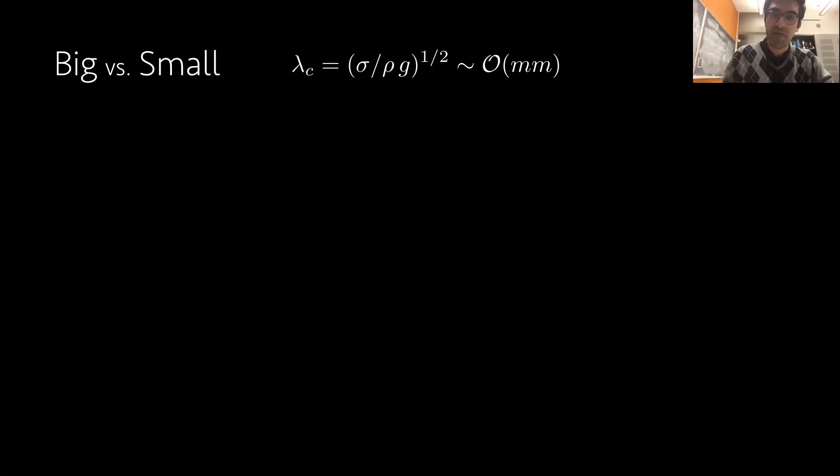But if you look at the literature on free surface viscoplastic or yield stress materials, the majority are looking at scales that are much larger. Here's an example: a mud slide in Southern California. If you're looking at mud slides, lava flows, snow avalanches, which somehow manifest yield stress materials, the scale is typically several meters or kilometers. And at that length scale, obviously much larger than our capillary length scale, you don't care about surface tension. There's a big body of work on that area.

Christophe Ancey has a review on JNNFM that reviews the work until at least 2007. It's a very nice read.

But if you go to a smaller length scale, here's an example. If you go to droplet size, your characteristic length scale of the problem is close to your capillary length scale, so this is where capillarity is important. If your material is yield stress, then plastocapillarity becomes important.

So in the next few slides I'm going to review the field, bringing some examples where plastocapillarity is significant. The first are drops. There are relatively few papers that have studied drops of yield stress fluids. I got this picture from the work of the lab of Volfango Bertola. What is shown here is the droplet dripping off a nozzle, and from left to right the yield stress of the material is increasing.

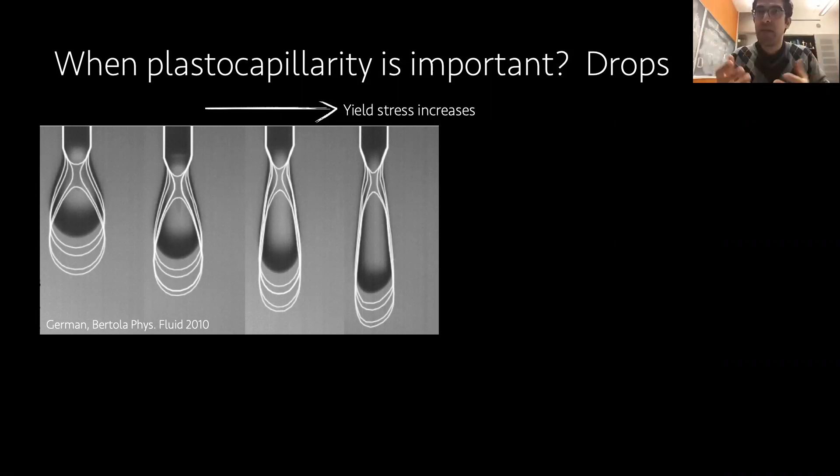The group of Bertola and some others more recently have looked at this problem. There are some other works from the lab of Coussot, this beautiful paper of Luu and Forterre, and also the group of Randy Ewoldt, who studied droplet formation and impact. But most of them, especially the one listed here on the right, paid less attention to surface tension because in the regime they studied, surface tension is not actually that important.

We also looked into droplets of this shape recently. I'll just show you some videos. What we did was let this droplet pass through an air-water interface, and through this very simple system we showed that you can get spherical or non-spherical soft particles, and in some regimes you can actually make capsules to encapsulate gas.

I'm not going to talk about this work in detail, but you can have a look at our paper. This was work with a very talented undergraduate student, Dave Kemper, in the group of Physics of Fluids of Detlef Lohse. Right, so this is about drops.

I'll come back to the drops later during the talk. But another part where viscoplasticity or plastocapillarity can be important is bubbles.

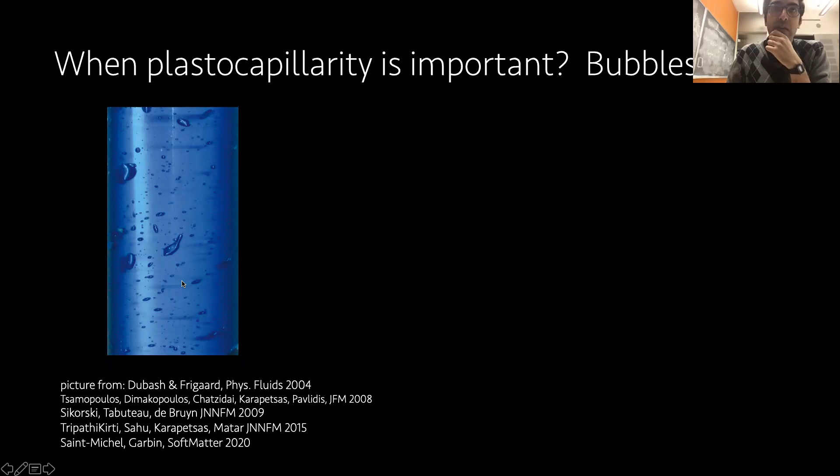Our work on plastocapillarity and bubbles was slightly different from bubbles in the bulk of fluids. We looked into bubbles like this, reaching the free surface and then bursting at the surface. Again, I'm not going to go into detail, but let me show a video. Basically, this fluid here, where the bubble bursts at the surface, is now viscoplastic.

In a work that actually came out today on arXiv, you can see how yield stress changes this very dynamic process. In particular, you can see you get this final cavity shape, which is characteristic of viscoplastic materials and doesn't happen in Newtonian liquids.

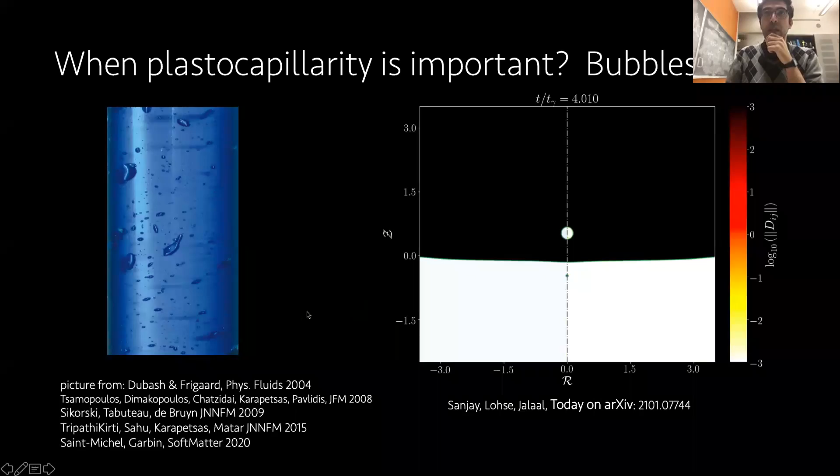More related to the talk today is the process of coating. There are many methods of coating fluids on a surface, and in many industrial applications these fluids are actually viscoplastic, or at least show some non-Newtonian behavior.

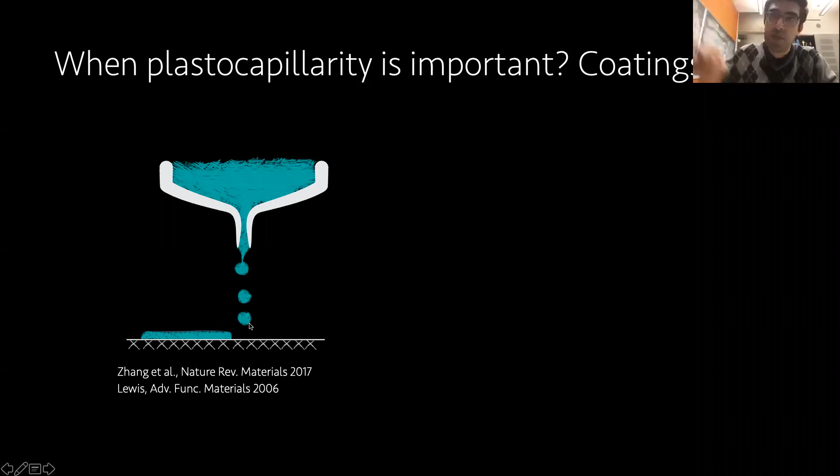One way of doing so is through inkjet printing, when you put single droplets on a surface one by one. A more common and known method is the dip coating method, where you have a piece of solid surface that you dip into your material and drag it out, and you get this thin film deposited on the surface. The thickness of this film is actually determined by surface tension, and if your material is viscoplastic, by the yield stress.

This basically is a very nice problem to study plastocapillarity. Again, the group of Coussot looked into this problem, but the regime they studied, surface tension, if I remember correctly, was not very important.

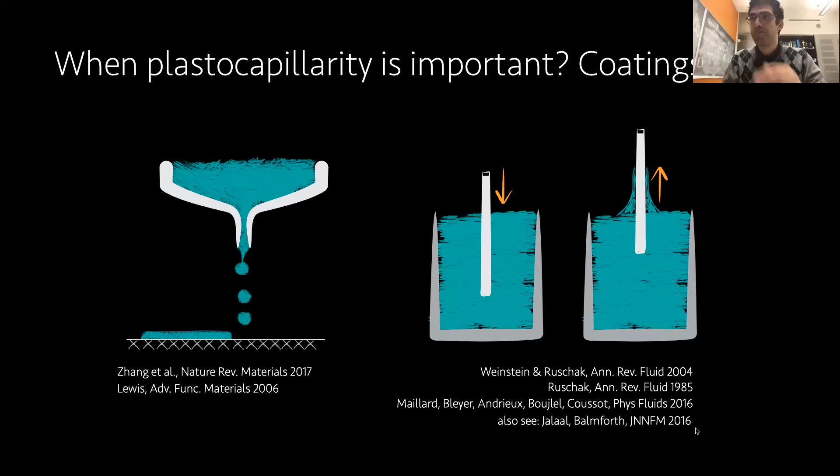What really drove me in the past few years to study this topic of plasto-capillarity is the emerging industry of 3D printing. Here I have three examples of plastic, clay, and food 3D printers. It's easy to agree that none of these fluids are Newtonian, and I guarantee all of them have some yield stress, because that's what you need to make 3D structures.

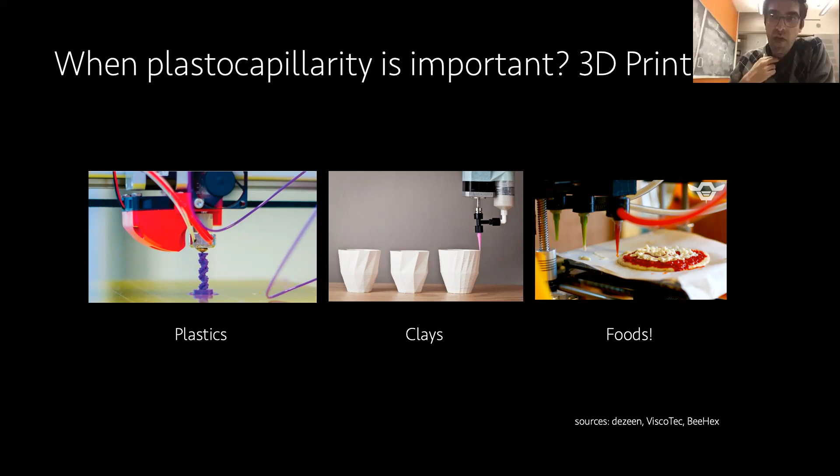You need yield stress to keep the shape intact. If you ever wonder how this type of 3D printer works—the so-called fused deposition or extrusion 3D printers—here it is. Basically, to make a 3D printer, all you need is a pressure source, a nozzle, a viscoplastic material, and a soft or hard substrate. That's all you need for a 3D printer.

What happens in reality in industrial sectors is that you put this pressure source on a robot, you program it, you give the robot the CAD file, and the robot does the printing for you.

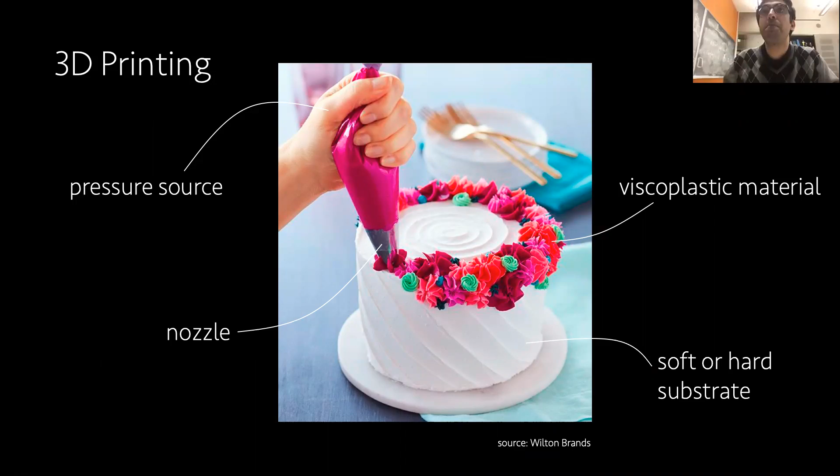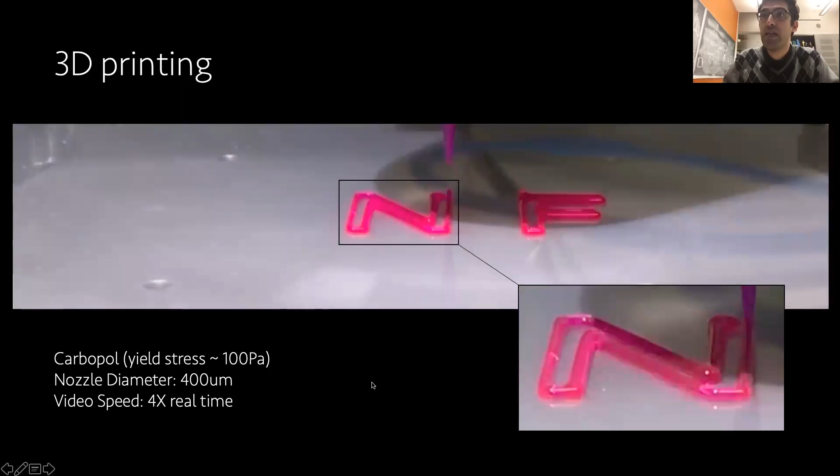Here is an example that I did just last week. My material is Carbopol, with a small nozzle diameter, and this is a speed-up. This is my nozzle printing something—I'm zooming in here. This is the first layer on top of my plastic, in this case actually a deformable surface. After the first round is over, I start printing the second round, and you keep doing this. If you have the right materials, you can print in 3 dimensions.

It's relatively an elegant science—what happens is that you spread this material on the substrate, and then spread the second layer and the third layer on top of the liquid.

This motivated us to try to answer three questions, which are the outline of my talk: how does a viscoplastic droplet spread on a surface? Can we control this spreading? Can we go a bit smarter about controlling it? And toward the end of this talk, I will come to more modern 3D printing technology to avoid some difficulties. So here is what I call the simplified spreading problem.

The problem is like this: I have a solid surface that is pre-coated with a thin film of thickness h-infinity, and I put a droplet that is much larger than that on top of the surface, and let it spread.

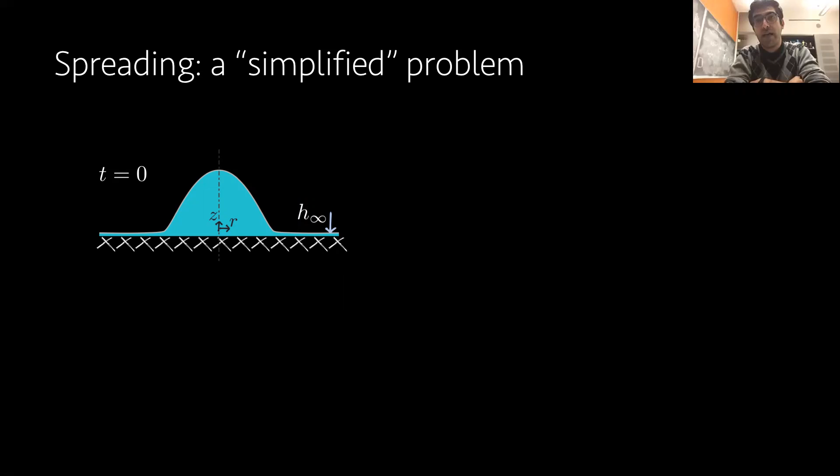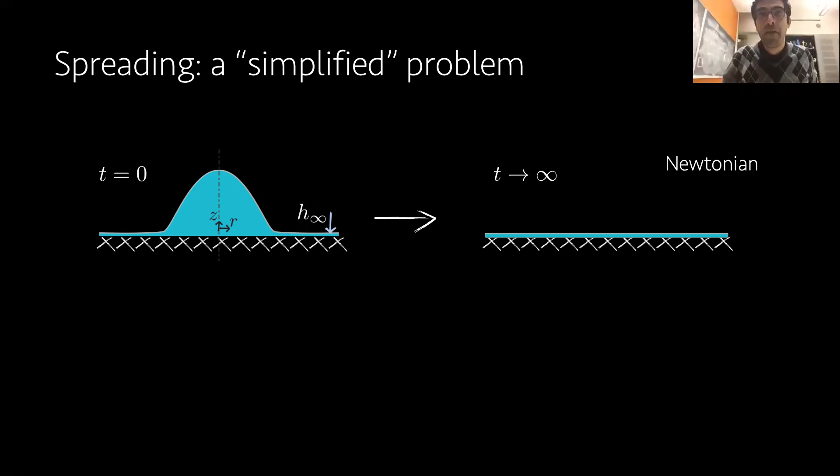If the droplet is Newtonian, you can easily guess that as time goes to infinity, this droplet spreads until it becomes fully flat—nothing stops the droplet from spreading on the surface. I won't talk about Newtonian droplets since this is a non-Newtonian fluid seminar series, but I want to note that even the Newtonian problem has a lot of interesting things to look into.

With Carola Seyfert and Jacco Snoeijer, we looked at the same problem more recently. Very long story short: if you go to capillary numbers of order 1, your smaller-scale dynamics might go through some dramatic changes. So one should be careful about capillary numbers, even when talking about a simple Newtonian case.

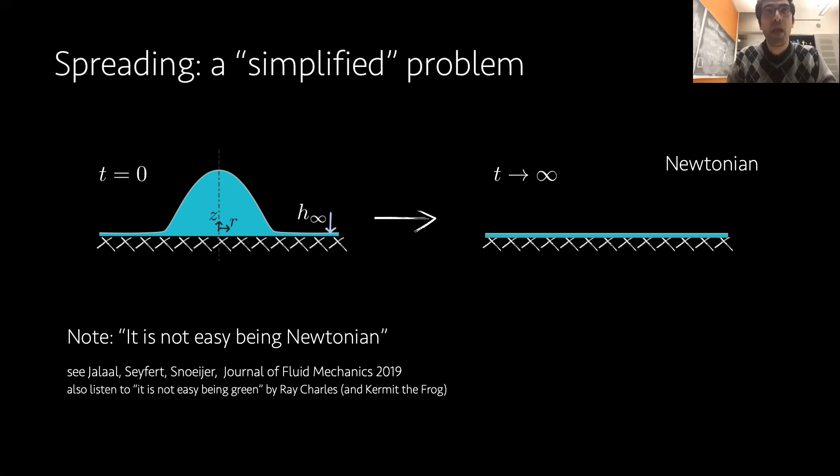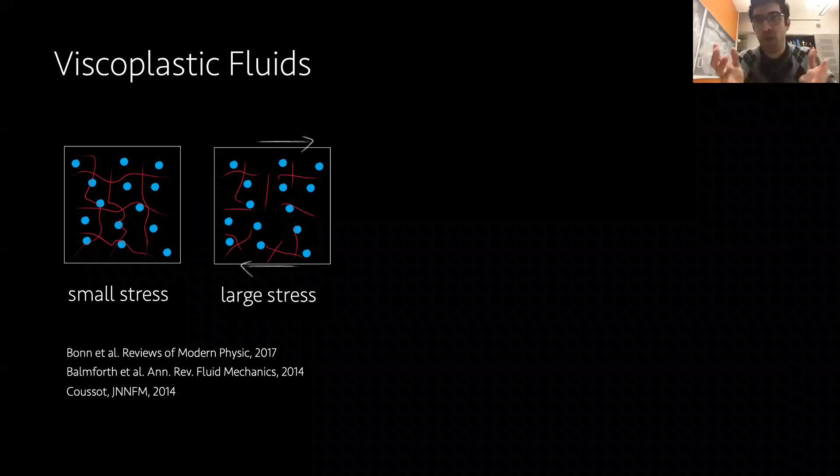But our fluids, motivated mostly by the 3D printing industry, are not Newtonian—they're viscoplastic. So what is a viscoplastic fluid? It basically has a yield stress. Below the yield stress, the material looks more like an elastic solid, and above the yield stress, it behaves more like a viscous fluid, but this viscosity is typically also non-linear, like shear-thinning behavior. You can graphically show it like this.

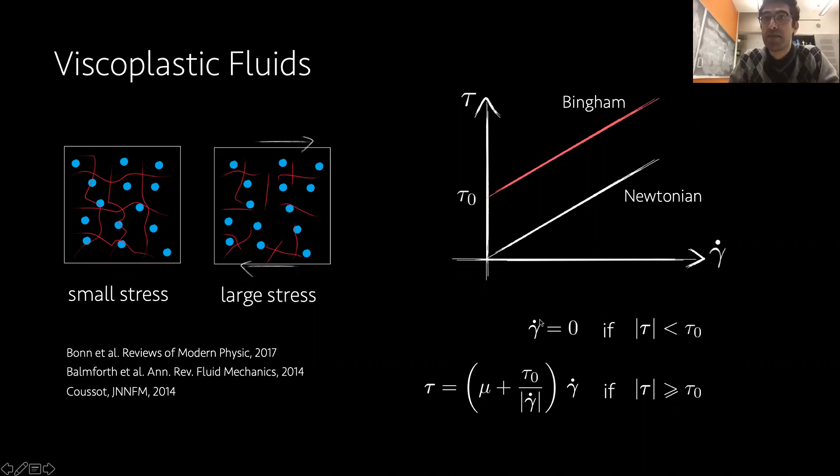The x-axis is my shear rate, the y-axis is stress. For Newtonian fluids, it's a straight line passing through the origin, and the slope of the line is your viscosity. But for a Bingham fluid or a viscoplastic fluid, you have this threshold stress, an offset—that stress is the yield stress. If the plastic viscosity is constant, you have a Bingham fluid. In tensorial form, you can write it like this: below the yield stress, the deformation rate tensor is zero; above it, you get deformation.

The problem now is that if I replace my Newtonian fluid with a viscoplastic fluid, I get a final shape that is not flat. My droplet spreads until the stress everywhere inside the droplet falls below the yield stress, and that's the moment the droplet stops moving. You can think about cosmetic cream or toothpaste, which doesn't spread fully—it would, if it were Newtonian and didn't have a yield stress.

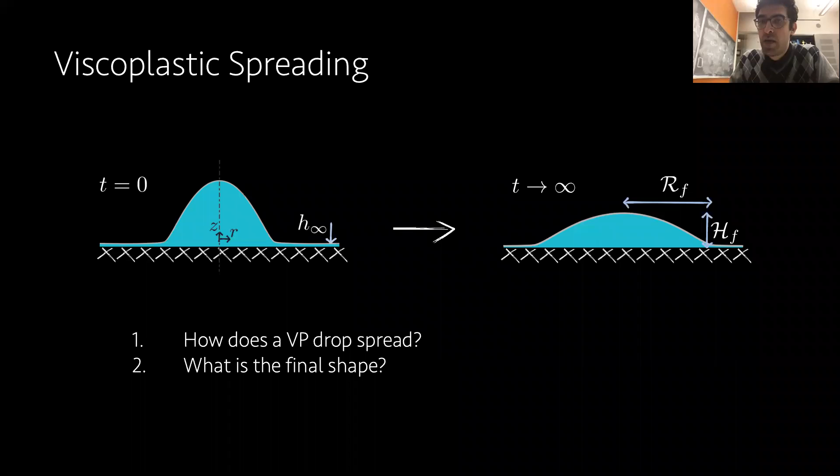Okay, so we studied this problem and we tried to answer two questions: how does this viscoplastic droplet spread, and what is the final shape? Let me start by answering the second question, which gives you maybe the most important part of this talk: the scaling law.

Consider a viscoplastic droplet of volume V at its final shape. This droplet has a characteristic length scale L. If this volume was spherical, L was the radius of that sphere. It spreads, reaches this final shape, and if you imagine it's shallow and looks like a hemisphere, your volume is proportional to the final height times the square of the final radius.

Now I can actually balance forces searching for that final radius. The final radius in particular is important for us because that result somehow corresponds to the resolution of my 3D printer.

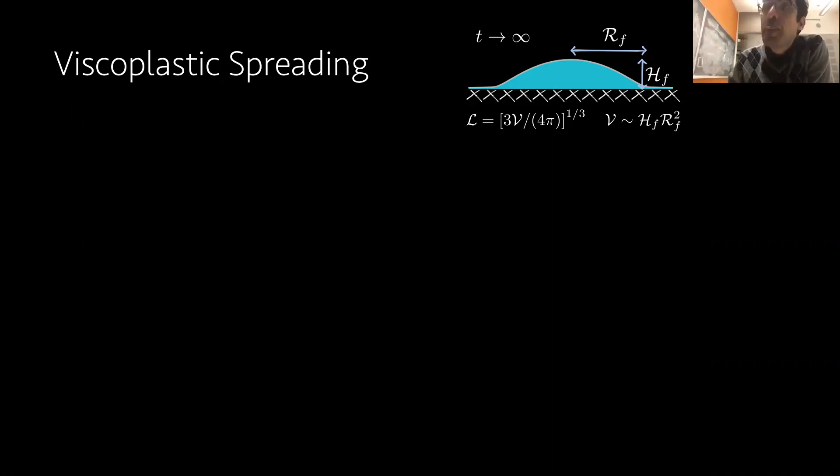So on the left, I have a capillary force. The capillary force is basically pressure, which is the surface tension coefficient times a characteristic curvature times a characteristic area. That gives me a force due to surface tension. I balance this with my yield stress force, given that the yield stress on the base of the droplet is doing most of the resistance. If you write this, you immediately get a scaling law.

Let me walk you through this equation. On the left of this equality is the final radius, non-dimensionalized by the characteristic length scale. On the right, there's a prefactor omega C times this non-dimensional number to the power -1/7. This non-dimensional number was called capillary Bingham previously in the literature because it's the multiplication of the capillary number and Bingham number. I like to call it the Plastocapillarity number because there's no velocity in it—it's basically material properties and a length scale.

So what does it do? It compares the yield stress with capillary stresses. As the yield stress value goes bigger, J becomes bigger, and therefore your radius is smaller. So it's not rocket science—the stiffer your material is, the less your droplet spreads.

This scaling is somewhat new, but this number has been used in the literature. Volfango Bertola, and also a review by Nir, have looked into the problem. I also found this relatively old Belarusian paper—if you do the non-dimensionalization slightly differently, you still get the same number.

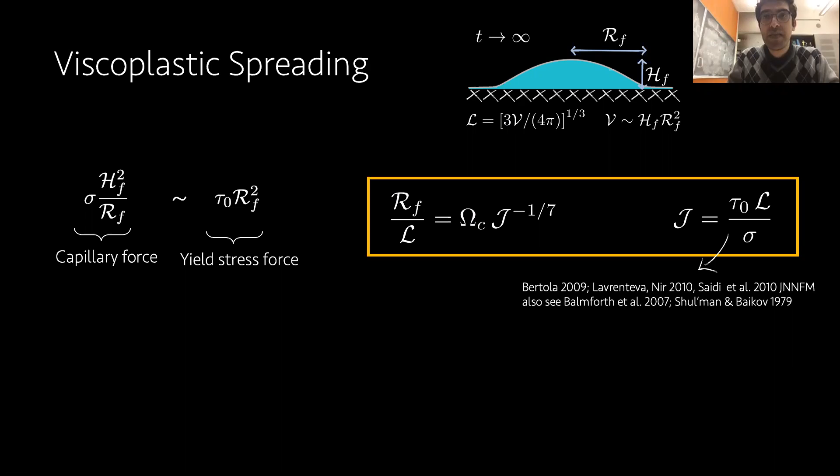This is the balance for when you have pure surface tension effects. You can do the other asymptotic limit, when your droplet is so large that gravity is doing all the job of spreading—think about geophysical fluids, or the type of rheometry done sometimes for cement and concrete. If you do so, you can balance the gravity forces with the yield stress forces and get another scaling.

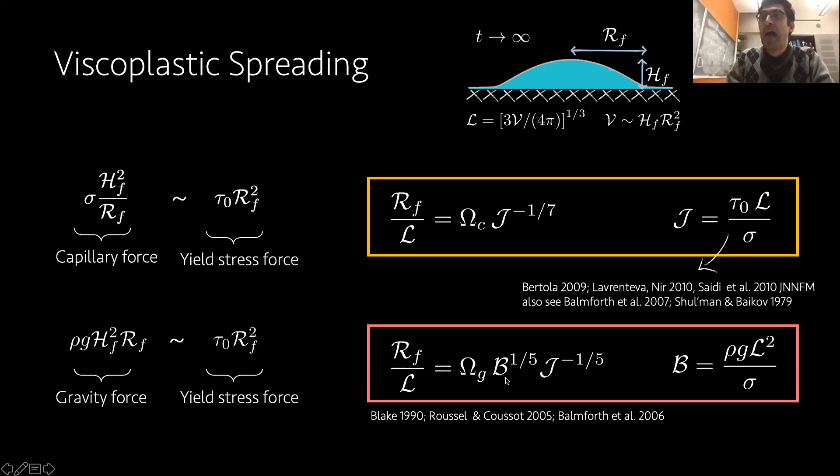So your final radius now balances, in this way, with another prefactor. Now another dimensionless number shows up, the Bond number, which compares the gravitational force and the capillary forces. Just a quick note: what I have on the right side does not have a surface tension coefficient because there's no surface tension forces—if you multiply Bond and J, the actual surface tension cancels off. I wrote it this way for the sake of consistency.

This is nothing new—many works, as cited here, have done this. In fact, you can get this prefactor exactly because your equations are much simpler when you're in a gravitational dominant field. So we searched for those prefactors—let me go back.

We search for these prefactors, and also the dynamics of spreading, through a theoretical framework called viscoplastic lubrication theory. I will try to explain it very quickly.

If you have a thin film that has a height h, and this height is order epsilon smaller than the horizontal length scale—basically it is shallow—you can start from Navier-Stokes, go to asymptotic limits, and for a small Reynolds number you get this parabolic velocity field. You do the height averaging and get this relatively famous equation, called the evolution equation or thin film equation.

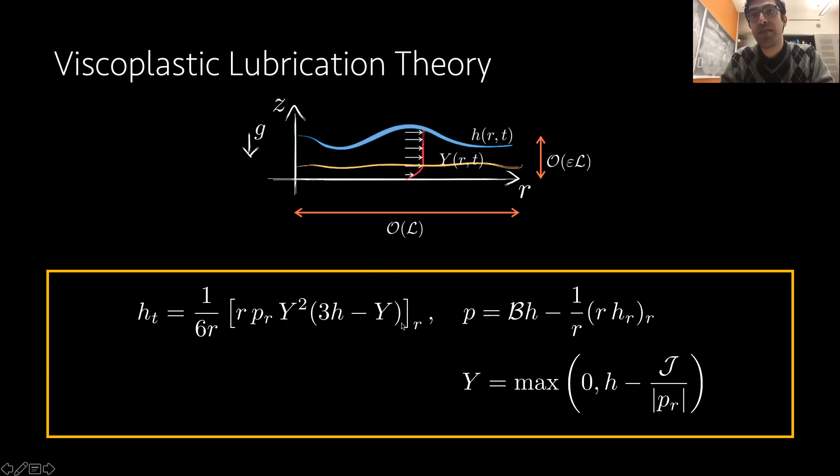Let me tell you, before moving to the solutions, a little bit about the limits. Imagine Y goes all the way to H, so all the way up - I'm yielding everything, meaning I have a Newtonian limit. You see it here: if Y equals H, this gives me H cubed again, the Newtonian lubrication equation. If Y goes to 0, that's my final shape, because everything is plugged up, nothing moves. So Y equal to 0 is my final shape. I'll get back to that later. So we solve this.

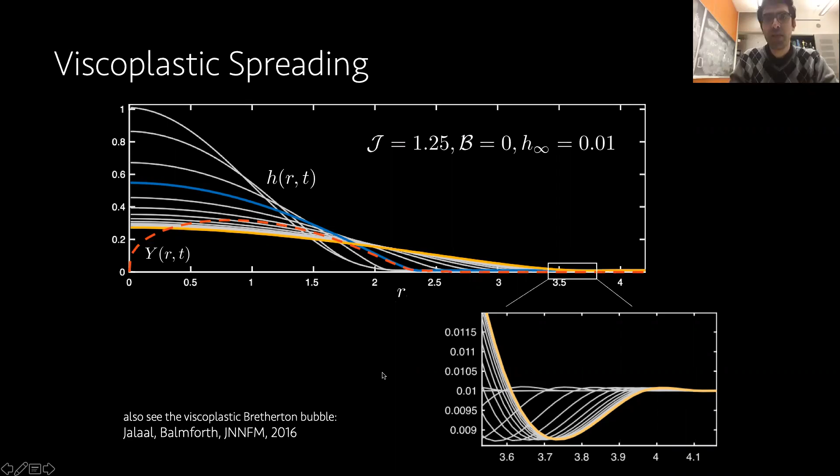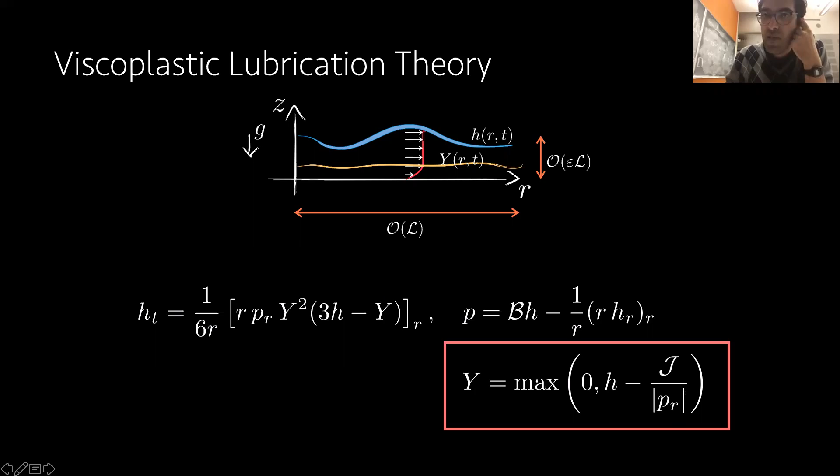Okay, so you can do this and get this final shape. But like I said before, if you're only interested, as we mostly have been, in the final shape, you can just look at this equation: Y goes to 0, that's my final shape. So all I need to do is solve this differential equation. It looks simple, but if you open it up, it's not that innocent - it's relatively high order, third order, and you have this switch of sign on the right-hand side that you have to deal with.

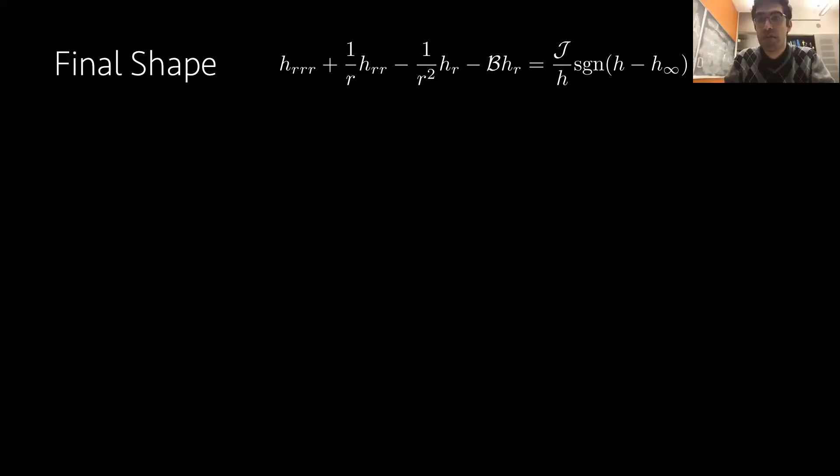Okay, so with two notes, I'll go and try to wrap up this theoretical part. To do these asymptotic solutions, first you have to prove these undulations end at a finite radius. Because in the Newtonian case, this wavelength is constant and they go on forever, mathematically, of course. But here we show that they not only decay in length scale, but also in amplitude. Therefore, they furnish a final accumulation point, and we find the boundary condition at that point. So the most important thing you can get out of these solutions is this.

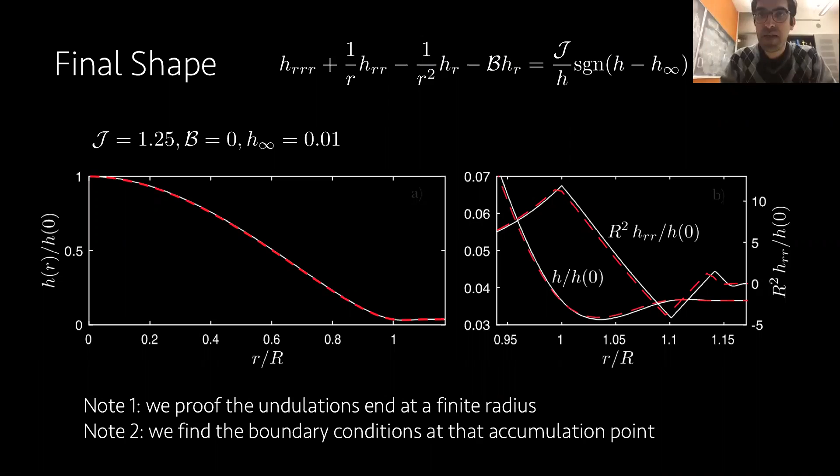Okay, so I try to avoid all the algebra and give you the final results. I can basically say that my final radius balances like this scaling law I showed you before, and this omega is a function of some of those parameters, my prefactor is a function of them, namely H infinity and Bond number.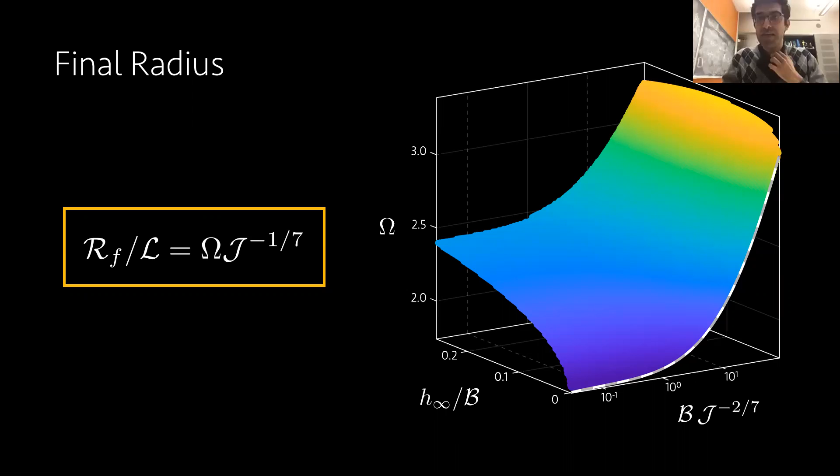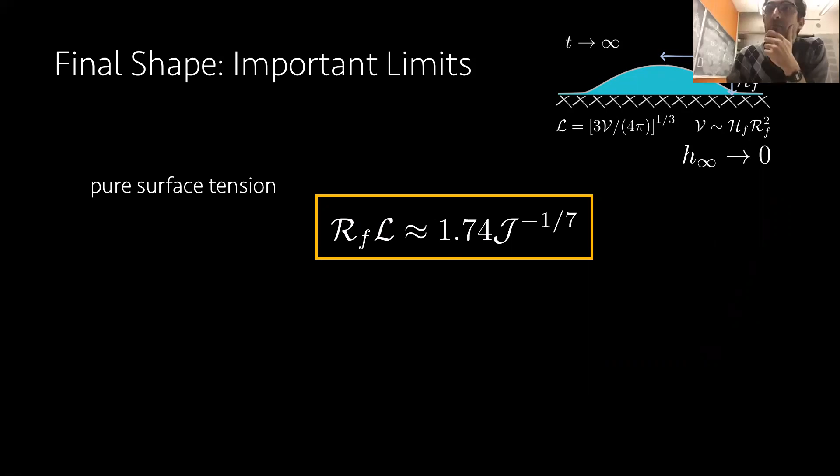Okay, so this is nice. I wrap up the theoretical part, and I promise I won't talk much equations after that. Some important limits: if you have pure surface tension driven droplets and the thickness H infinity goes to 0, your prefactor is 1.74. So the prefactor is always around 2 - we got lucky, it's order 1 actually. And for the gravitational case, your prefactor you can find exactly, and that's this number, 25/8 to the power of 1/5.

Okay, so you now have a lookup table that is fully theoretical to find your final radius, but it was time to do experiments. Our experiments were fairly simple to do. We have a camera on the left, we have diffused light on the right. We use treated glass surfaces to avoid slip.

As you know, these viscoplastic materials also slip on the surface. What we've done, we use glasses that have positive charges on top. If you're interested in that, you can have a look at our Langmuir paper. We inject fluid through the nozzle, like how 3D printers work.

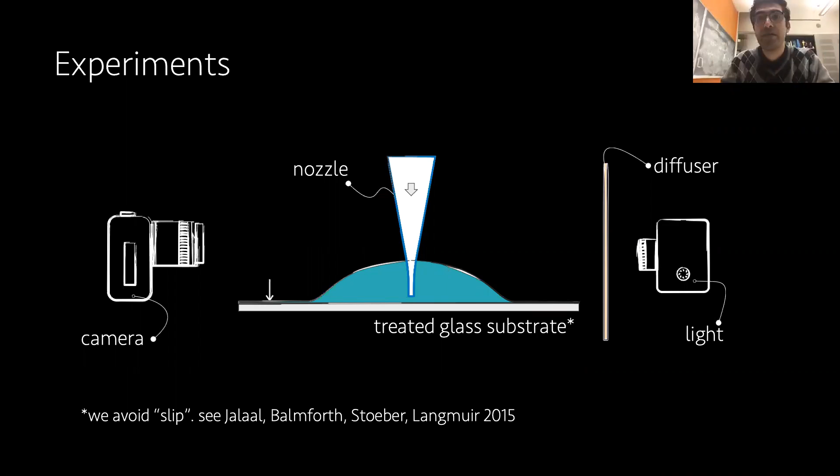The droplet grows and spreads, and we look at the final shape. Our material was Carbopol, the beloved simple material that people in the yield stress community use.

On the left, I'm showing the elastic properties of Carbopol for a given concentration. As you can see, if the stress is low, your G prime, which are the circles here, is much bigger than your G double prime. So the material is more like a viscoelastic solid, with G prime being much larger. But as you put more stress, it starts to yield, and then both G prime and G double prime fall. Your material now looks more like a Herschel-Bulkley fluid, and you can get the flow curve.

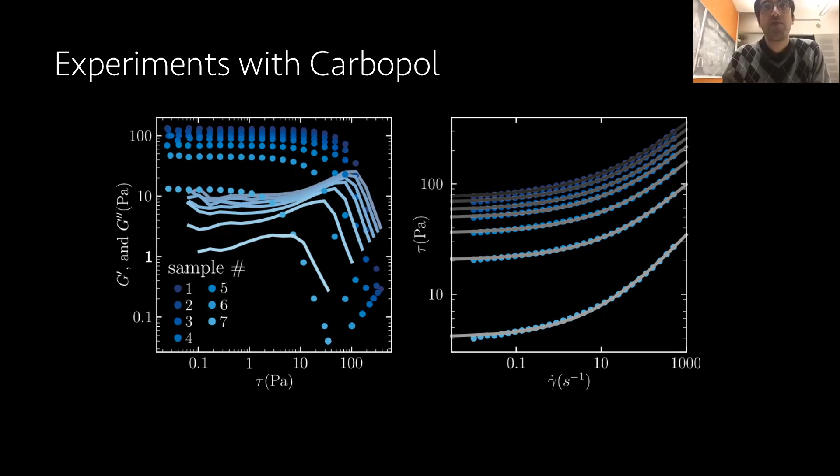You can tune these properties by changing the concentration of Carbopol, and this is what we've done - we tested many of them. So this is how a video of an experiment looks like. You inject the fluid, the droplet grows, you stop the pump, the droplet relaxes and gets to the final shape, and the final shape looks like this.

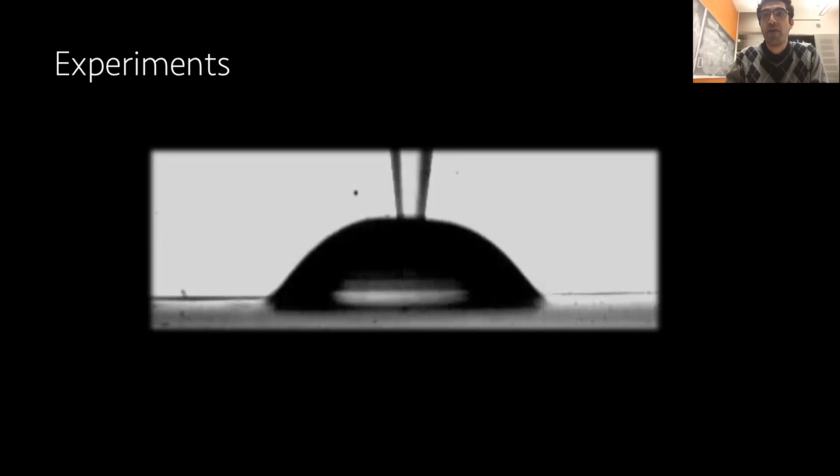So here is some comparison. The lines show my asymptotic limits for different Bond numbers, and the symbols show the experiments also for different Bond numbers. Let's go through it in more detail. The very good thing that made me happy is that the scalings look pretty okay compared with experiment. If you look at the crosses, this is my smallest Bond number, so my scaling of -1/7 should be valid, and it's fairly there.

And it looks like the experiments move towards the gravitational dominance scaling when the droplet becomes large. It also looks like systematically my asymptotic solutions are overestimating the experimental results. And there's some sort of behavior at large J values that doesn't follow a simple scaling behavior.

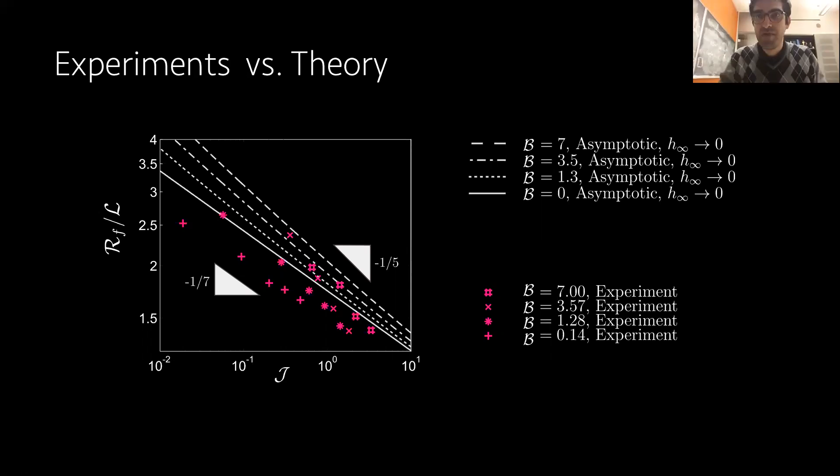Okay, so this overestimation made us think about what could be the problem. The first thing that came to mind was that we assume these droplets are actually shallow in our theory, but if you remember the experiments, they're not particularly shallow - some of them are actually quite fat.

So what we've done next was try to actually solve the full equations. These are basically the continuity and momentum equations. Here I'm showing you the non-dimensional one - that's you have Bond number, this must be B to be consistent with my symbols. But anyway, what's important is that this deviatoric stress term is now governed by the Bingham constitutive model. So how does it look like?

My strain rate should go to 0 below the yield stress, and should look like a Bingham plastic above the yield stress. But we didn't really solve for the exact yield surfaces, let's say. So we used the regularized version of the Bingham model, which looks like this, basically.

In dimensional form, I basically use a maximum viscosity. There's another viscosity in my equations that prevents the overshoot of viscosity. So there's a large viscosity in non-dimensional form. My regularization looks like this.

So there's an Ohnesorge number, you can think about it that way. So materials that reach the plastic state, or when the stress goes below the yield stress, my fluid flows with this Ohnesorge max or large viscosity value. We made sure that our results are quite independent of this regularization parameter, of course.

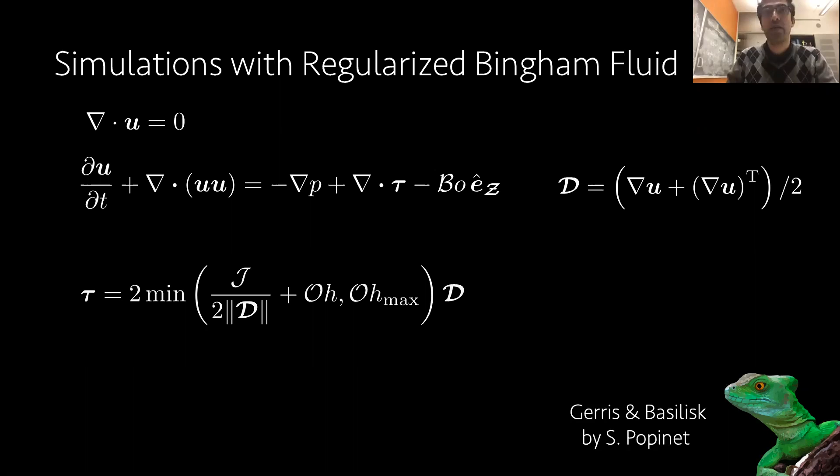Okay, we use Gerris and Basilisk as our solvers. These two magnificent numerical platforms are developed by Stephane Popinet, who is at Institut d'Alembert in Paris. And here are some results for these values.

So there's no gravity in this example that I'm showing you. Everything is driven by surface tension. So this is a droplet. At the edge, this is almost time 0. You can see the deformation.

I should mention the color is the log 10 of the strain rate. So basically, whenever it goes to white, I have a lot of deformation. And whenever it goes black, basically, there's not much deformation.

So now with such a method, we can also look into more of the anatomy of the flow. What you will see is that, of course, you have high curvature at the contact line that drives the flow. And then at the center, something grows that looks like a static plug. There's a stagnation point there, so it's not surprising that a static plug forms there.

As time goes on, there is another low deformation zone growing close to the surface, which looks like a somehow rotating, moving, co-moving plug region at the surface. What is more important for us, for our application, is at some time, like the lubrication one...

Everything inside the droplet, the stress falls below the yield stress, everything goes black, meaning the droplet stops spreading. And that's my final radius, okay?

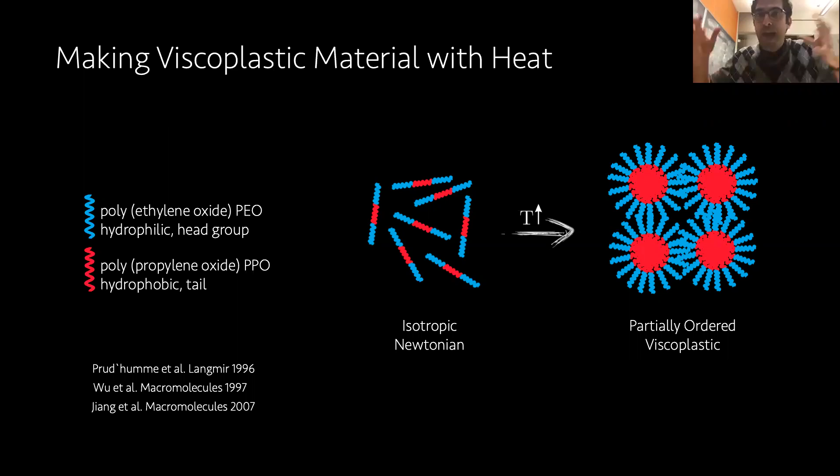What is super interesting about this polymer is that if you heat it up, it forms micelles, and if the micelle concentration is high enough, they pack, and then they form a viscoplastic material. It's super counterintuitive if you don't know anything about them. Typically, if you have a polymeric solution, you heat it up, the viscosity goes down, but this one is magical. You heat it up, it suddenly turns into a viscoplastic, yield-stress fluid.

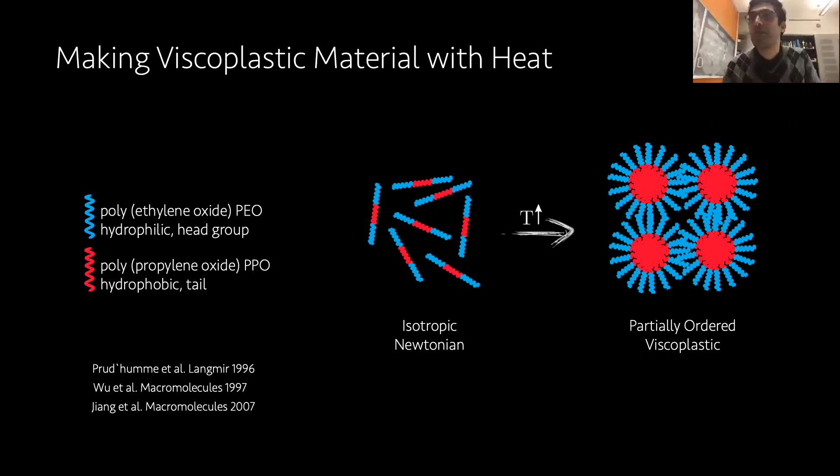We've done some comprehensive rheology of such materials. I won't go into the details, but here is a summary. The y-axis is the temperature, the x-axis is the concentration of polymer. If they're both low, you have a Newtonian fluid, and there is a sharp jump to the yield stress material that is over this line.

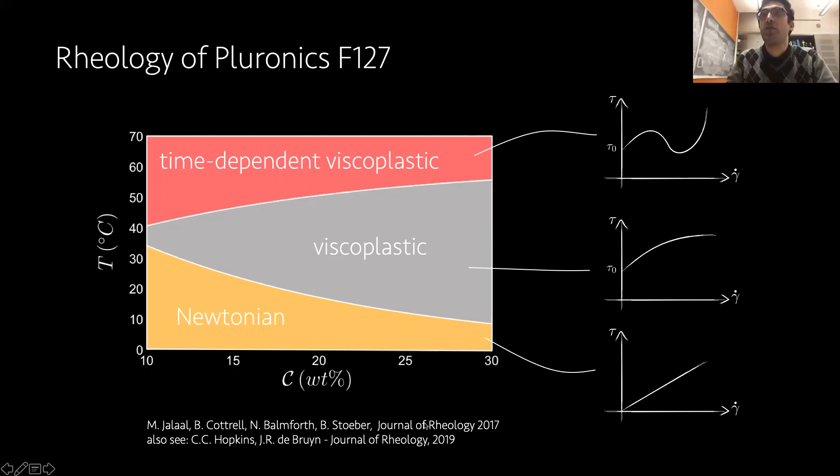What we also found out is that if you go to very high temperature, something weird happens: you get negative slopes in your flow curve. We couldn't repeat those experiments. More recently, the group of Hopkins and De Bruyn published a very nice Journal of Rheology paper looking at the same fluid and found that this behavior is most likely associated with the long relaxation time of the polymer. Have a look at these two papers if you're interested in the rheology of this.

So in our setup, we did pretty much the same thing with the camera and the light. We now inject the fluid, but we also have a heater to heat this fluid from bottom, basically to turn it viscoplastic, to see if we can control the spreading.

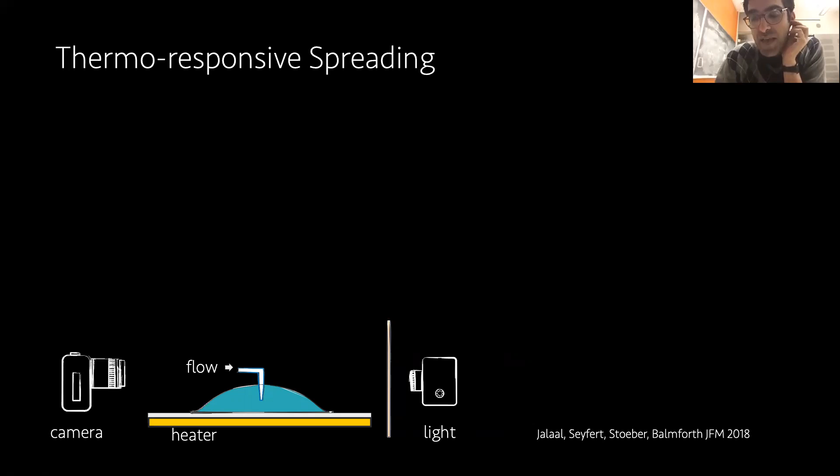We also did something else. On top of this spreading droplet, we put a device using an optical technique called optical coherence tomography. For the experimentalists in the audience, this is basically an interferometer using white light, which does the interference of all the wavelengths of the white light, and through that gets information in depth.

What we did is a bit of modification, trying to do some sort of microrheology. So we added microparticles to our thermoresponsive polymers. The measurement voxel of this experimental technique is around 10 to the power 3 micrometer cubed, and we put smaller particles inside it.

What these smaller particles do, when they do Brownian motion, is create local light interference, which results in so-called speckle patterns. If they are in gel, they're trapped or caged in the polymeric matrix and don't do Brownian motion. But if they are in a Newtonian phase, they do Brownian motion. So that was the idea.

This is the type of dynamical signals that you get. On the left is low temperature, so my fluid is Newtonian. On the right, you see the high temperature viscoplastic ones. You don't see the particles, but you see their macroscopic manifestation in this dynamic speckle pattern.

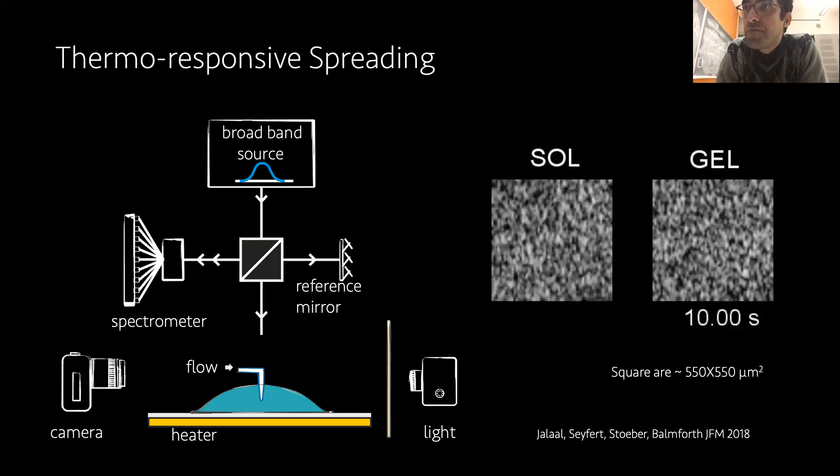Here is one example: a droplet heating from below. We did cross correlation to find out where the fluid turns to gel first, so becomes viscoplastic first. It surprised us in the very beginning that, as you also saw, the gelification starts on the interface of the droplet first, and then comes from the heated surface.

It puzzled us for a while, but what we found out is that such behavior is because of evaporation. So a little bit of heating, you heat the air, water escapes, polymer concentration goes up, meaning gel temperature goes down, and...

...your polymer turns to gel. So with this technique, we actually went way beyond what we really wanted to do in these experiments. We found we have in situ measurements of what really happens in a droplet that is changing its phase because of temperature.

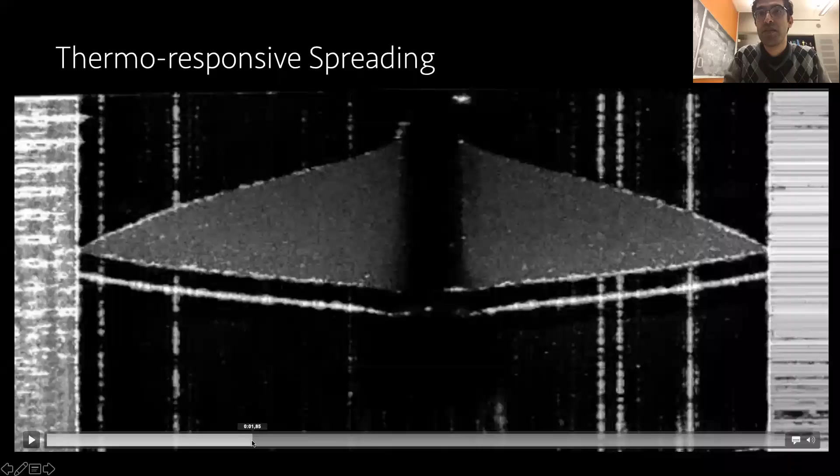So does this happen for the spreading droplet? Yes. Ignore the curvature you see on the bottom, that's an artifact of the method. So what I showed you was a thermoresponsive droplet spreading on a heated surface. The droplet is in full Newtonian phase. This stops at some point, and then we can see the formation of gel.

Through this method, here is a snapshot of the same video I showed you. The droplet spreads, it stops, no sign of gel formation, but then after a while we see that the gel starts to form inside the droplet. These experiments actually made us answer one classic question in solidifying spreading droplets, which I'll come to.

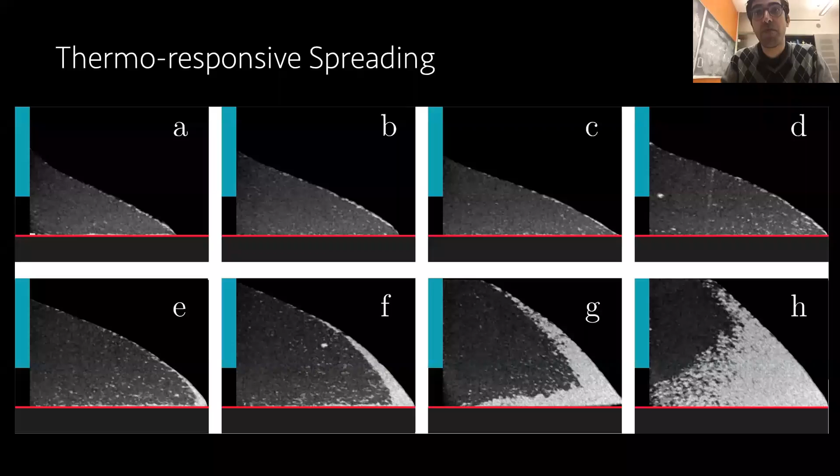And the cool thing about these polymers is that you can actually do the cooling, so you can reverse the process, and then they become a Newtonian fluid again, and you can wash them off fully. So you can use it as a smarter way of printing and removing, printing and removing, if you want to use it in 3D.

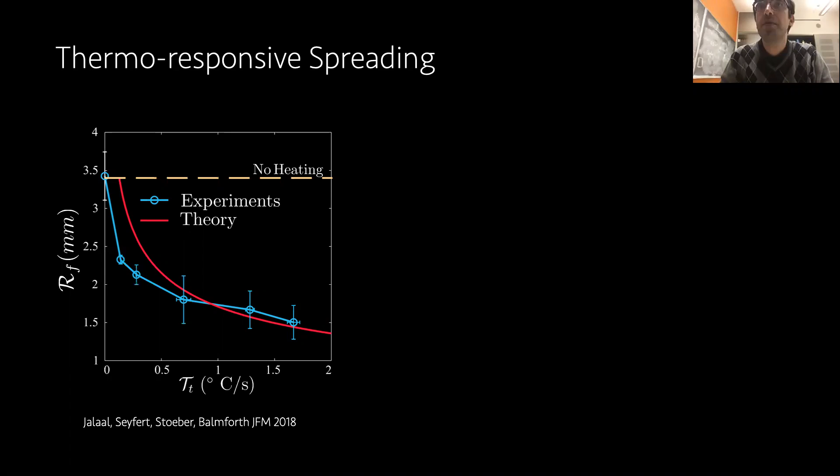As I said, there was a long-standing question of what stops a spreading droplet that is solidifying on the surface. There were two dominant theories in the literature. One from Sonin at MIT, who assumed air is fully insulating, so the fusion front looks like this. There was a counter theory from a group, Kavehpour at UCLA, who said no, actually because of air you get a solidification front that looks like this, and that will stop the droplet.

So here, for some of the first time, we actually presented direct experimental observations of what happens. What we saw is that what stops the droplet in this regime is contact line, microscale contact line solidification. That's enough to arrest the droplet while it spreads.

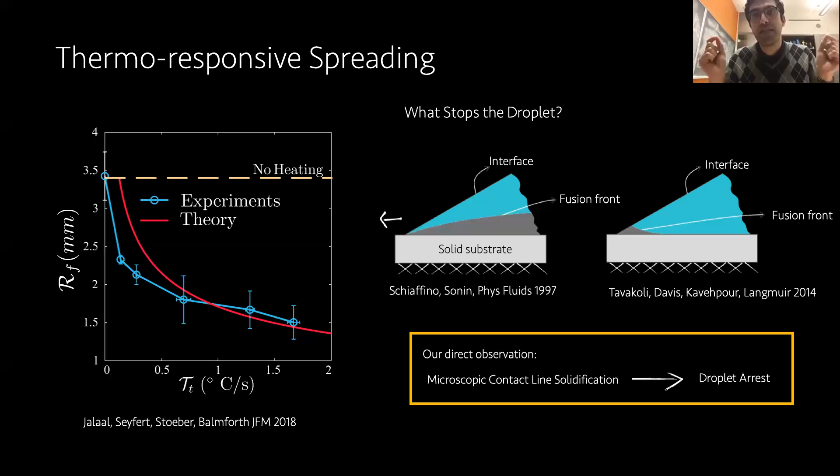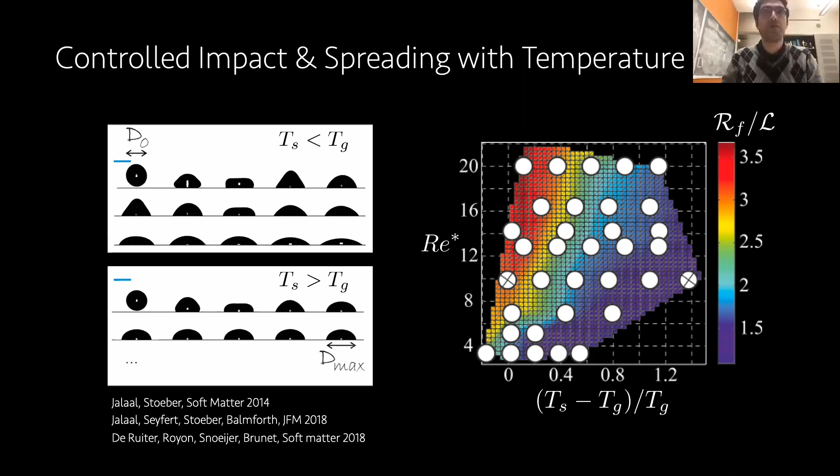The same thing works for an impacting droplet. As long as your Reynolds number is not huge, you can control the droplet's final radius just by changing the temperature of the surface. The X-axis here is a non-dimensional surface temperature, the Y-axis is the Reynolds number, and here I'm showing you the final radius. You can control your final radius either by Reynolds number or just by changing the surface temperature when using such a polymer solution. So I answered the second question to some extent too.

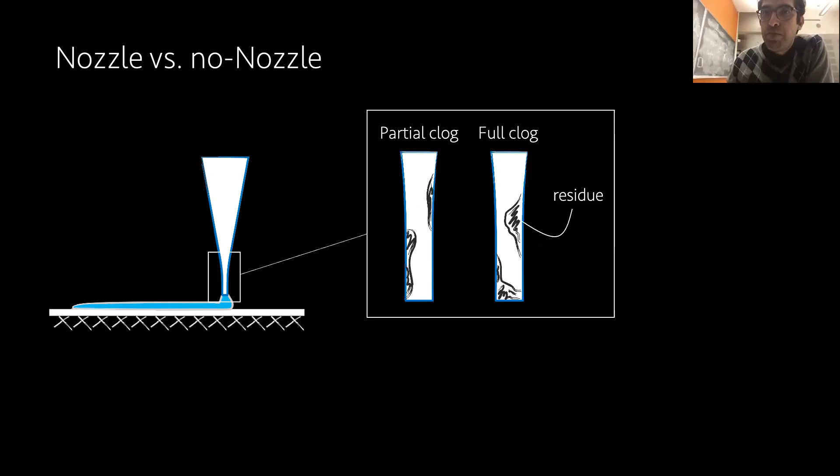The last thing I want to discuss is what we've tried to do in the past 2-3 years at the Physics of Fluids group at University of Twente. The big motivation was that everything I showed you so far was with nozzle-based 3D printers. If you have a 3D printer at home or work, you know the nozzles can be a pain because they clog all the time. So we thought, can we have a printing system with no nozzle, to avoid clogging and its associated cost, and also go much faster if possible.

So we started looking at the literature and found there are already works on this, and we started focusing on laser-induced forward transfer. People have looked into this, particularly in optical engineering and printing engineering. There's a very nice review paper by Serra and Piqué you can look at for an overview of the technology's advancement. So what is LIFT, laser-induced forward transfer? In theory, it's very simple.

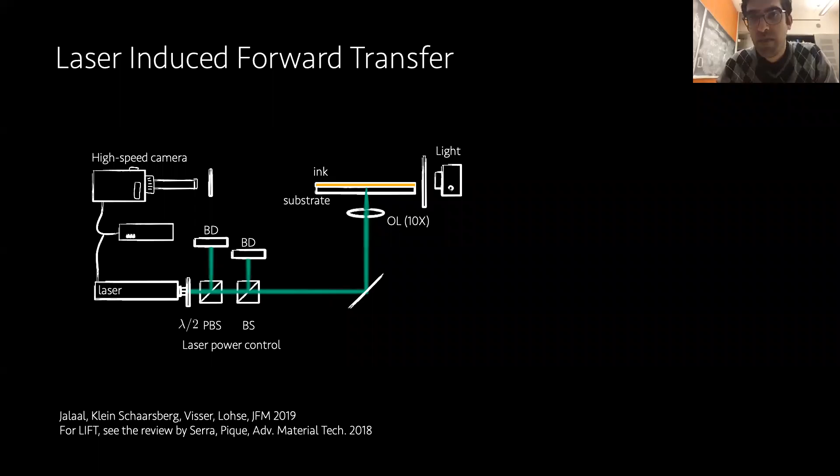You get a laser pulse, nanoseconds or picoseconds, and you guide that pulse to hit your ink, your viscoplastic material. We also added optical units to control the power of the laser, and high-speed imaging to look at what happens after we shoot the laser. We also had another optical unit to control where we focus the laser within this thin film of viscoplastic fluid. This is what happens: this is my carbopol solution, this is glass, I shoot the laser and form this jet.

So the idea is, if I could control this jet, I could use it like you do in inkjet printing or extrusion printing, and print with the droplet. Let me show one or two slides on how this system actually works.

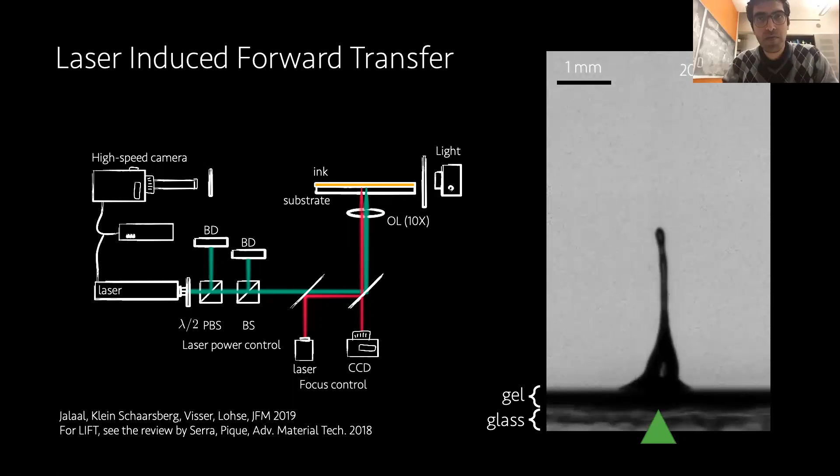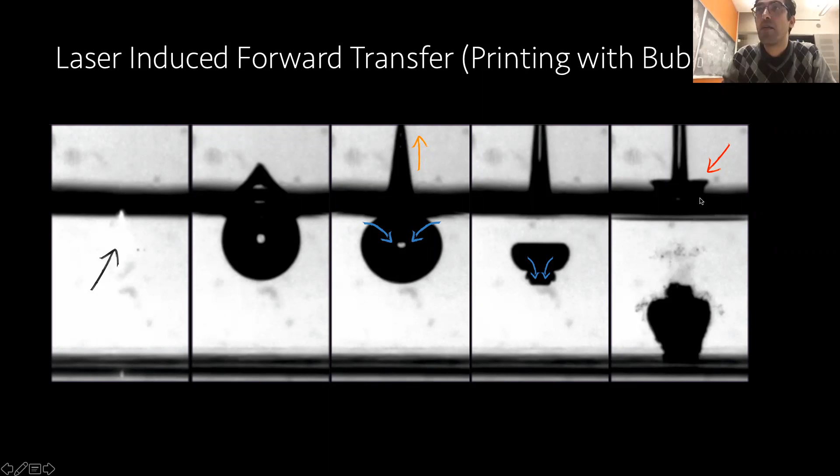We, in fact, are printing with bubbles. When you focus a laser in a thin film of liquid, this is what happens - this video is at 5 million frames per second, so a very fast process. What you probably missed is the very beginning, which I tried to stop: this bright spot is the plasma that you form. You break the liquid thermally and optically, forming a gas bubble that grows, and this bubble now controls the dynamics of the surface. Plasma forms, the bubble grows and pushes the fluid on top, then the bubble stops and collapses because of the pressure around it. We explain this whole phenomenon in detail in some of our papers - it forms this jet on the surface.

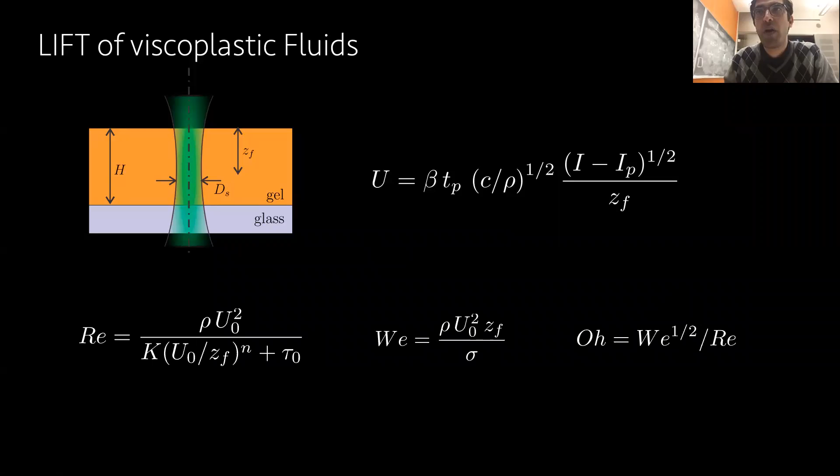Okay, we did a little bit of theory. I won't go into details, but what we did was find a characteristic velocity of this process by balancing the laser energy with the other initial parameters in our problem. You get this characteristic velocity that has many terms in it, but with that you can define your non-dimensional numbers involving yield stress and other rheological parameters.

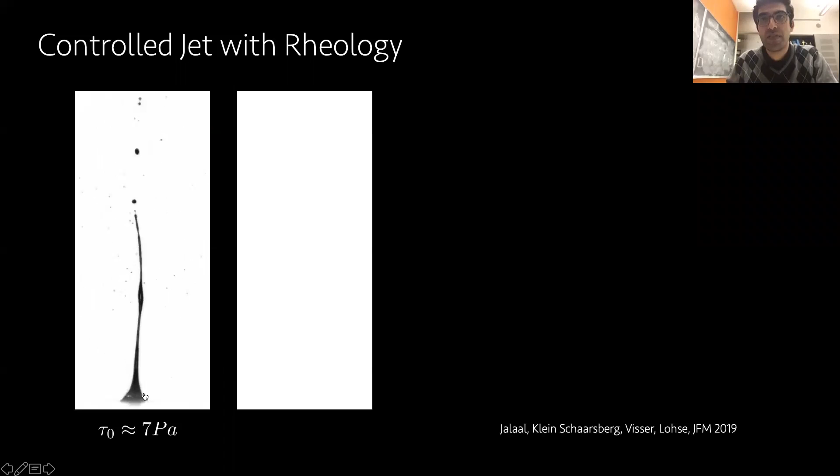So we controlled this jet - here's what happens. Everything is the same in these two videos except the yield stress, the rheology. This one has low yield stress - everything splashes around. You don't want to print with such a jet because there's a lot of residue. But if you tune your rheology with a bit of carbopol, for instance, you get this very nice jet. So this is perfect.

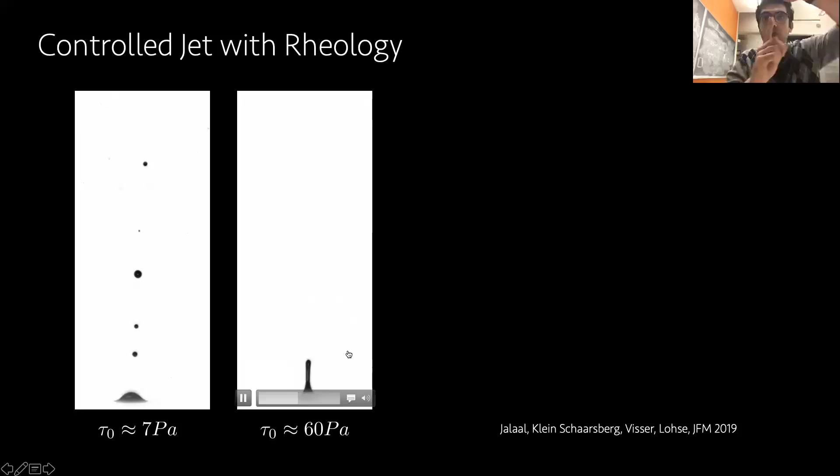If you put a surface here, this jet is going to touch the surface, and it comes down and leaves a tiny spot of ink on it.

With this method, we actually could print quite a lot of complicated structures. I wasn't sure because of copyright issues if I could show those pictures, so unfortunately I couldn't. But if you're interested, shoot me an email or message me, and I will show it to you in person.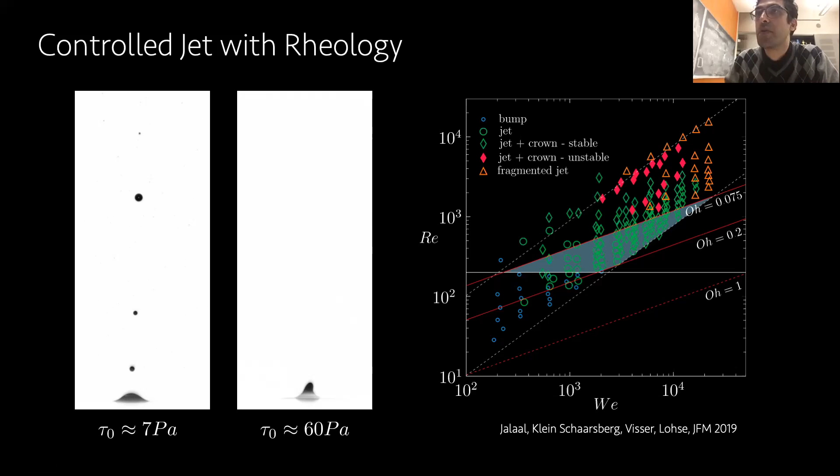Okay, before I finish, I want to address the elephant in the room, which is elasticity. There's always questions: what about elasticity? I talked about yield stress and viscosity, but didn't say anything about elasticity. If I want to quickly address this, whatever I showed you, you can of course add elasticity to your constitutive model and see if it is important or not. These equations I'm showing here are a relatively simplified version of what Saramito's model has, the one in the JNNFM paper of 2007.

I got this equation actually directly from the beautiful paper of Luu and Forterre. What it says is that below the yield stress, or here the critical yield strain, your material looks like an elastic Hookean solid, and above it you have this viscoelastic response. So here this is elastic solid, and then you have this creep term that gives you additional time, which is this lambda relaxation time that somehow is approximately like this.

So if you look at your material like this, within the context of what I showed you in this talk, elasticity becomes important at some point. For instance, when the droplet wants to stop, you can look at the non-dimensional number like the Deborah number, and that suggests that your elasticity might do something. We haven't looked at it—it might be important. For the case of LIFT, I don't think elasticity is actually important in the time that I've shown you at the very beginning.

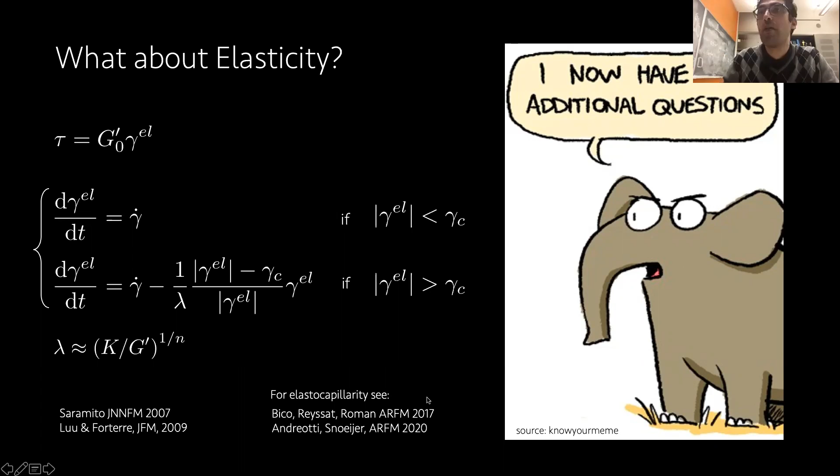Okay, so let me try to conclude. I gave you a little bit of information about viscoplastic spreading. This scaling law is so easy to look at—this omega, you shouldn't be worried about it. We did asymptotic solutions to find it for you, it's around 2. We showed that you can use thermoresponsive spreading as an effective way to control your final shape.

And with this method, using optical coherence tomography, you can actually observe phase change in situ in your fluid. I also talked a little bit about laser-induced forward transfer of viscoplastic materials. That is very, very promising, actually.

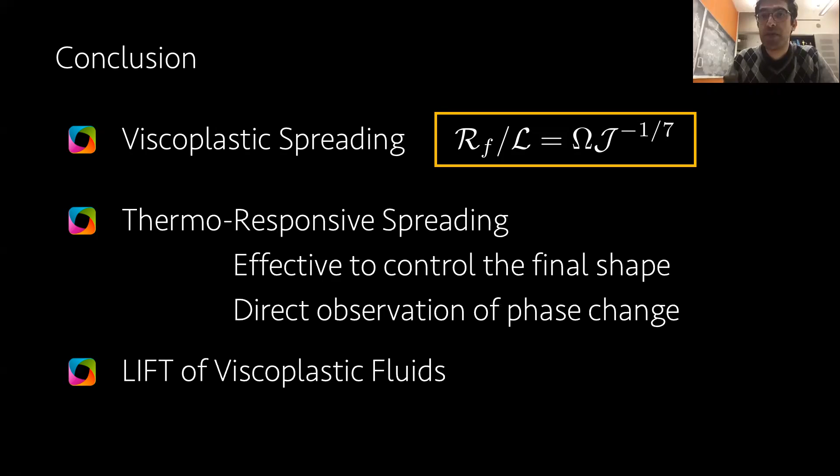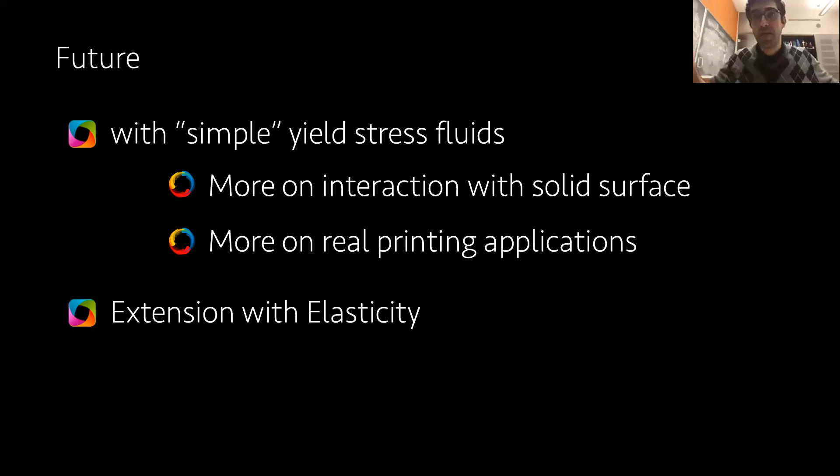Have a look at the future: of course, I still believe with the so-called simple yield stress fluids, theoretically, numerically, and experimentally, there is a lot of room—like the interaction with the solid surface, more application in printing. But of course, looking at elasticity can be very interesting, and also phenomena like the extension of these fluids.

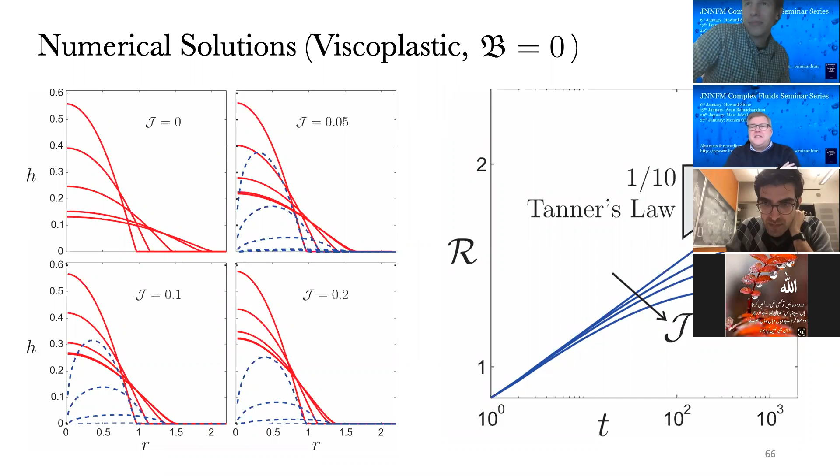If I may, Rob - well, you know, I'm famous for getting the microphone and not giving it up. No problem, Bushra. Could you show the plot toward the end of Reynolds versus Weber for the jet study? Could you show that again? Sure.

Yeah, this one. Okay, so what strikes me here is on log coordinates, by eye anyway - my eye, I've had enough coffee to do this - it looks like Reynolds is proportional to Weber, which means that Reynolds over Weber is one over the capillary number. And so it seems to me that maybe density doesn't have anything to do with this set of dynamics. If you renormalize the data as Reynolds over Weber, you'd get unique values for each of the experimental studies, the fragmented jet, the jet - in other words, you get a flow regime map that's independent of density and just has to do with the capillary number. So you could get to a simpler picture of these data.

Again, it's more of a comment than a question.

No, that's very correct. I'm glad you mentioned it, so I can elaborate a little bit. You see these two white dashed lines that somehow envelop my experimental data - those two are actually two constant capillary numbers, and this happens because of my dimensional space parameter. The density of these fluids, being carbopol solution, is almost the same for all of them. Each of these lines, if you could see, basically each set of experiments that I do with a given fluid gives me more or less a straight line in this phase space. The reason we ended up using Reynolds-Weber with the Ohnesorge number on top is to be consistent with the literature of inkjet printing, which does exactly the same thing. They use pretty much the same numbers, and some cross Ohnesorge numbers to define their favorite spots for printing. So that's pretty much the only reason we use this - it's quite empirical, the whole thing.

I mean, is it due to some defect on the surface, or something like that? I'm not sure if I understood correctly, but is it something like this you mean? At a certain point you showed a close-up of the advancing contact line, and I noticed the contact angle changing much, and I was wondering if it's connected to this surface tension question or not.

Yeah, I think it is. It's basically surface tension and yield stress. Let me elaborate a bit. The actual contact angle is zero here, right? Because there's a pre-wetted film.

The macroscopic or apparent contact angle varies. Yeah, that's what I mean. Not only for the advancing one, but also for the final shape, as I'm showing here. I was also suggested by some people previously that maybe we can use these experiments, if we really trust our theory, to measure the surface tension.

Could be, but we need to first show that the theory works perfectly. We are talking about really small values and small variations of the surface tension. So yeah, could be potentially, but if I wanted to put my money on one method of measuring surface tension, I would at least start with the stretching experiment and the pinch-off experiments.

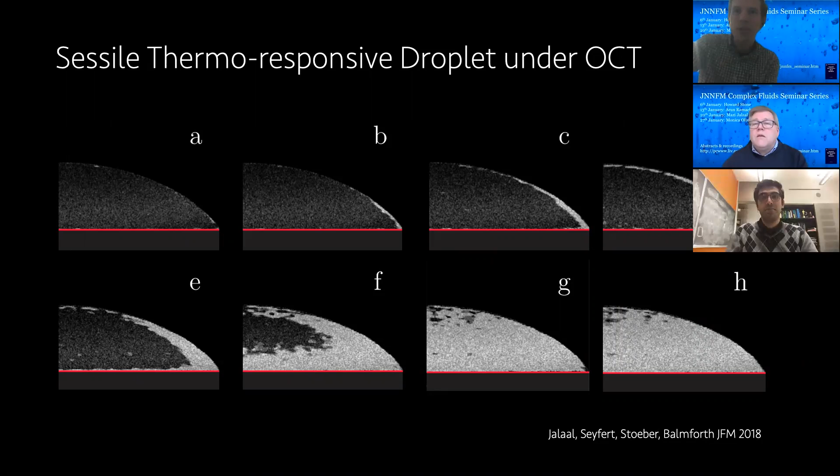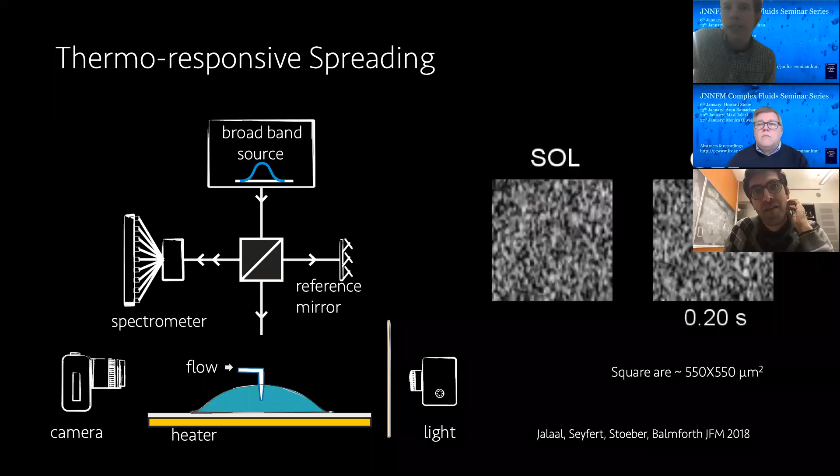It was just a question about the technique you're showing on that slide with the particles. I guess his question is, when you have the particles and they're in the gel, it could still be unyielded but in a plug, so it could still be moving. A very nice technique about the speckle. One question: the plug flow would also decorrelate the speckle. Is it not necessarily a yielded area?

Well, the plug flow is when you turn to gel. So what I showed you, if you have plug, you basically have gel, if I'm right. I think he means that it could also be moving, it could be not deforming, but all moving at the same velocity. Yeah, yeah, okay, yeah, I guess.

I mean, I can read the question the other way around: I have a Newtonian fluid that is moving. We don't have much strong convective flow in any of these experiments that I showed you. If you have, for instance, pipe flow of yield stress materials with this thermoresponsive one, I guess that becomes more challenging because you have to think about the convective flow, but there are ways, because this device gives you way more than what I just showed you. You can get a lot of phase information and try to correct for that.

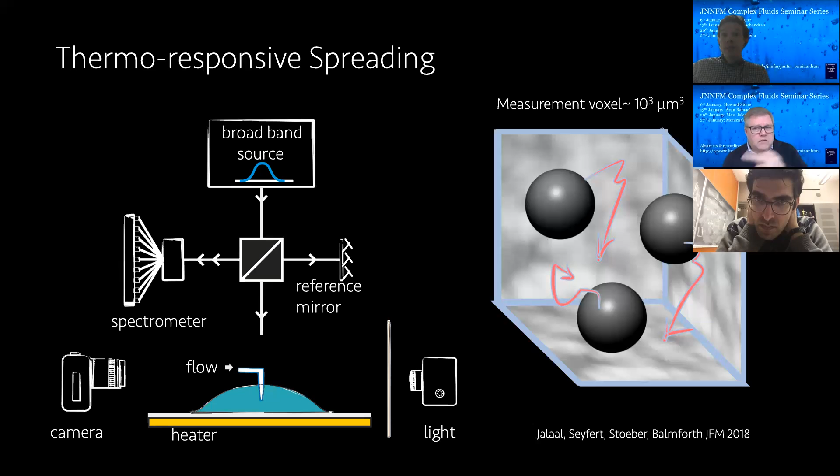So when you do the type of geometries you're doing, they just go and fill out that shape. But I'm wondering, that final shape is really just a property of your Bingham number, your J number, or some combination, and the volume, isn't it? Yeah, it's basically those three things.

When you do a transient problem, do you always get to that shape, or can you find initial conditions where you can somehow stop before you get there? It sort of implies that you keep filling out the shape, doesn't it? That's a great point, and you're absolutely correct.

I'm not talking about the theory, I'm talking about the general problem first. If you have a droplet that has a yield stress and you're depositing it on a surface, it heavily depends, especially when the yield stress is lower, on the history of the way you deposit it, because it's like a sculpturing, right? It depends how you form your sculpture. In the theory, the assumption is that everywhere inside the droplet is yielded in the beginning.

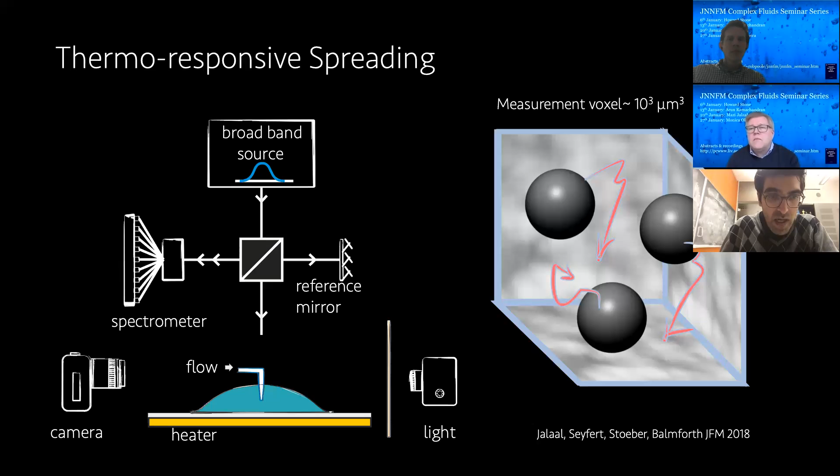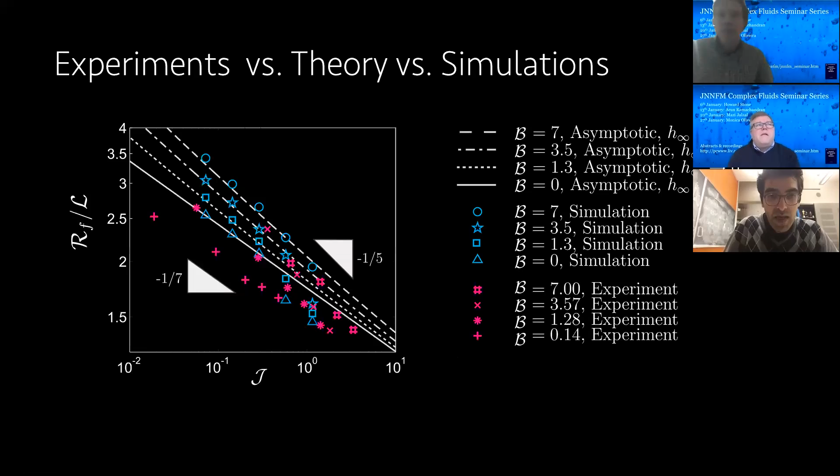I'm not sure how. I mean, you can do simulations like this, and then you're not limited to anything. You can deposit any shape anywhere.

Yeah, I guess for these ones, most of the ones that we see people do exactly this, they put it in the middle. But I suppose if you put it in an annulus or something like that, you would still have the same boundary conditions at the center, it would still be symmetry conditions. But it would have to spread in as well as out, wouldn't it? And I wonder if you would get to that shape.

I'm not sure if I understood the geometry, what you exactly mean by it. Well, a gap in the middle. Yeah, you could pick any - extrude through an annulus, so there's a solid bit in the center, so there's a gap. Then when you extrude, it's like a kind of curtain. So you don't have to have h equals 0 in the center, but you could have small h in the center, and a shape going up and down, just as an initial condition.

Yeah, I see what you're saying. Yes, I think if your initial condition is such that you yield everything... I didn't go so extreme with my initial condition, but I did change it to see if my final shape is the same. And as long as I am yielding everything, it is the same final shape.